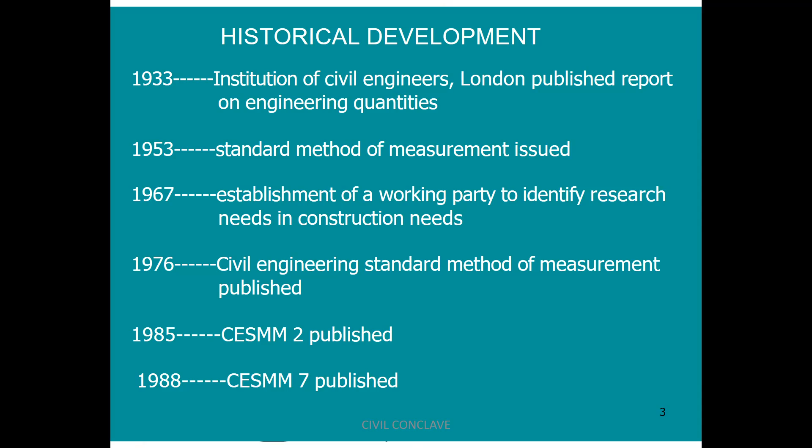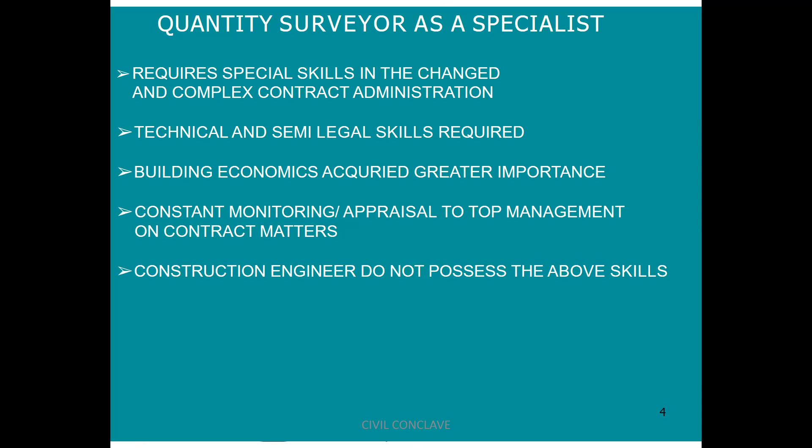Quantity surveyor as a specialist requires special skills in managing change and complex contract administration. Technical and semi-legal skills are also required. Building economics has acquired greater importance, requiring constant monitoring and appraisal to top management on contract matters. Construction engineers do not possess the above skills.

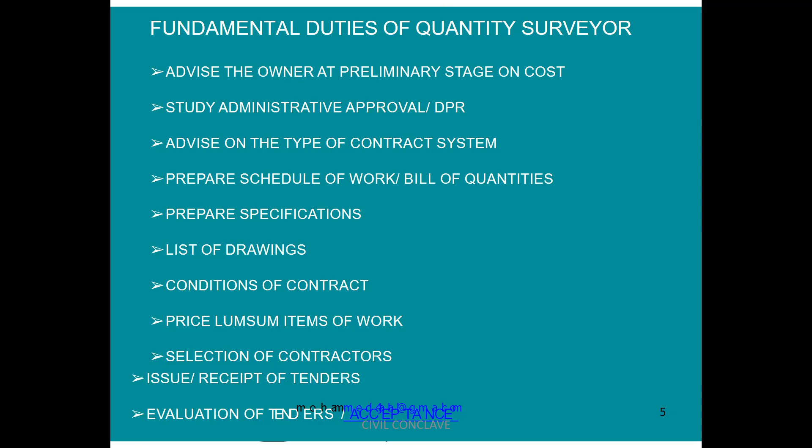Fundamental duties of the quantity surveyor: advise the owner at the preliminary stage of cost, study administrative approval DPR, advise on the types of contract system, prepare schedule of work and bill of quantities, prepare specification, list of drawings, conditions of contract, price lump sum items of work, selection of contractors, issue and receipt of tenders, and evaluation of the tenders.

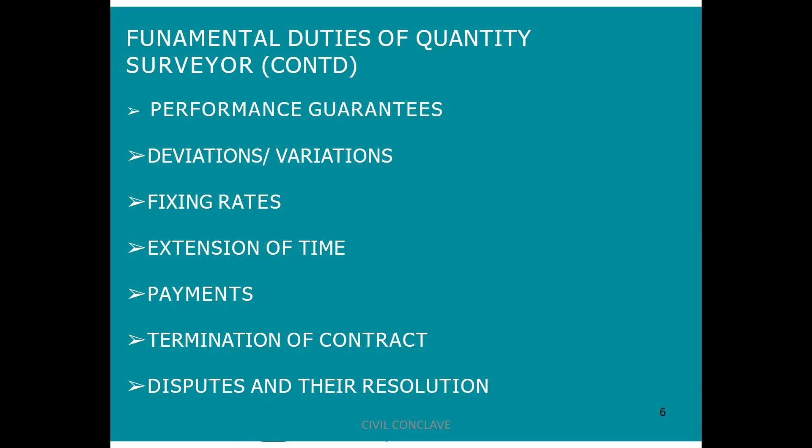He also has to check performance guarantees, deviations and variations, fixing rates, extension of time, payments, termination of the contract, dispute and resolution. All duties stated above include taking measurement and monitoring and variance reports.

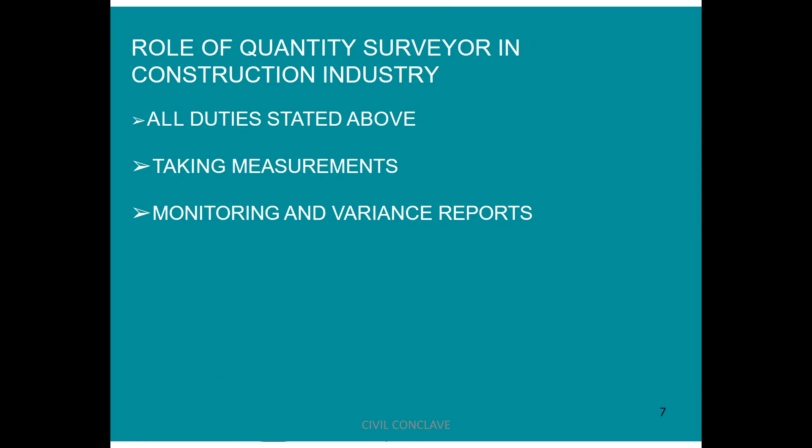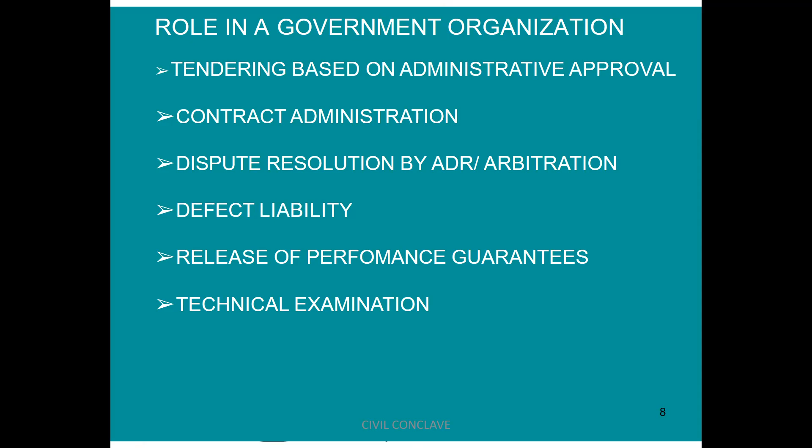Role in a government organization: if he is the quantity surveyor, duties include tendering based on administrative approval, contract administration, dispute resolution, arbitration, defect liability, release of performance guarantee, and technical examination.

Now let us talk about measurement and quantity surveying. Again, we cover historical development, quantity surveyor as a specialist, fundamental duties of a quantity surveyor, the role of a quantity surveyor in the construction industry, the role in government organizations, and the role of a quantity surveyor in planning, design, and construction.

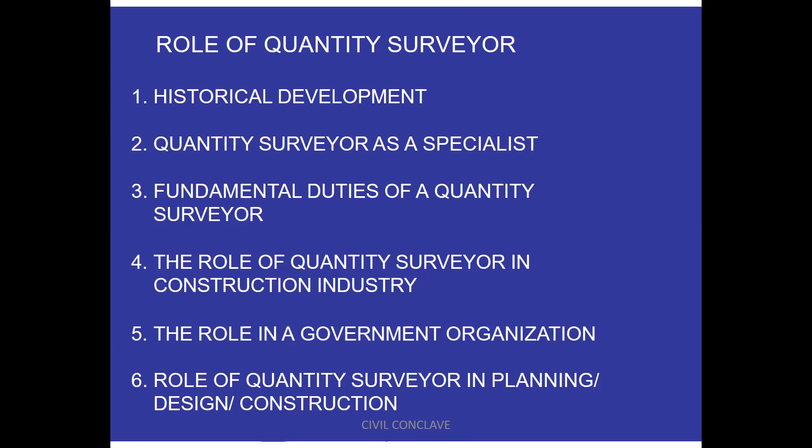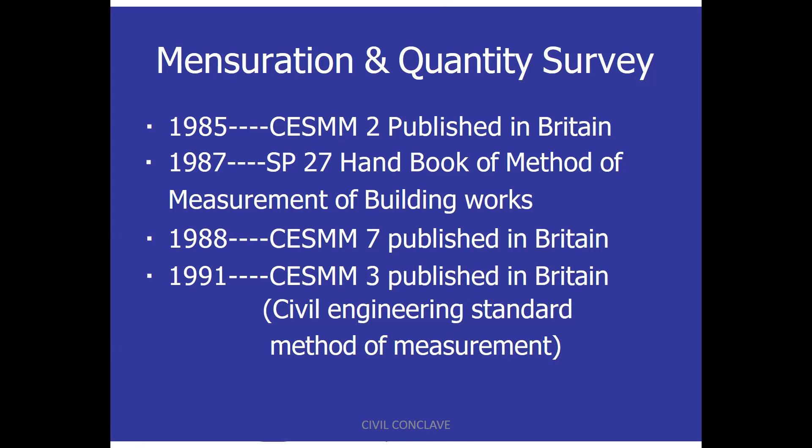In 1933, the standard of engineers was already explained to you. In 1985, CESMM 2 was published in Britain. In 1987, SP27, a handbook of method of measurement of building works, was published. In 1988, CESMM 7 was published, and in 1991, CESMM 3, the Civil Engineering Standard Method of Measurement, was published.

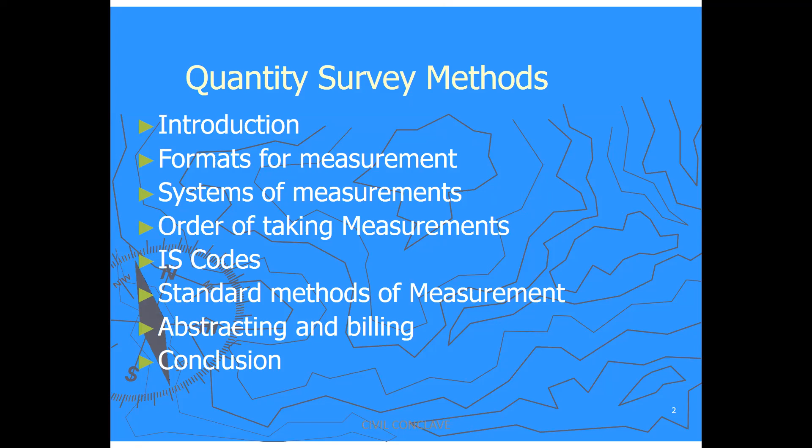Mensuration formula. Quantity survey methods in buildings we are going to discuss now. What we cover in this presentation: introduction, formats of measurement, systems of measurement, order of taking measurements, IS codes, standard method of measurement, abstracting and billing, and then the conclusion.

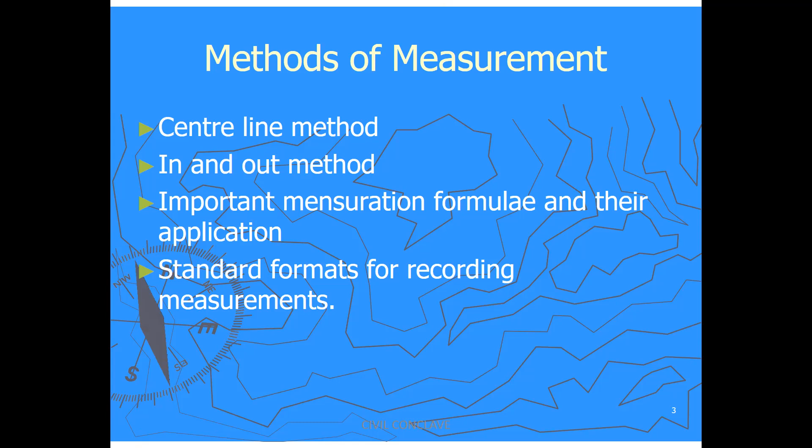The method of measurement varies as follows: center line method, in and out method, important mensuration formulae and their application, and standard formats for recording measurement.

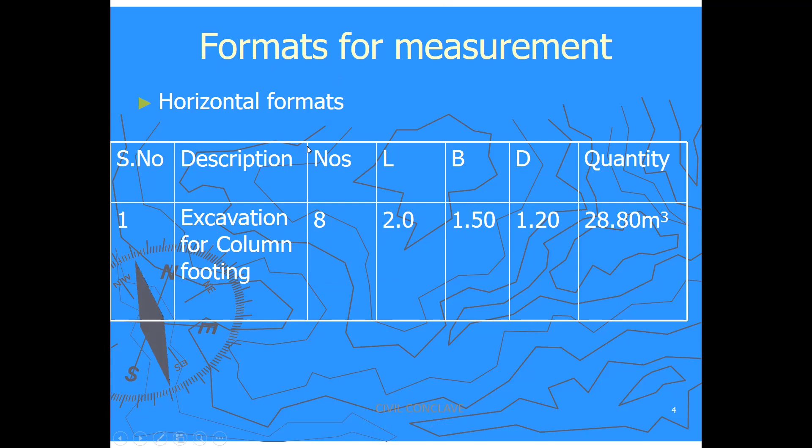For example, if it is an excavation, this is known as horizontal format, wherein you mention serial number, description, numbers, length, breadth, depth, and the quantity. This is known as horizontal format. Then there is vertical format.

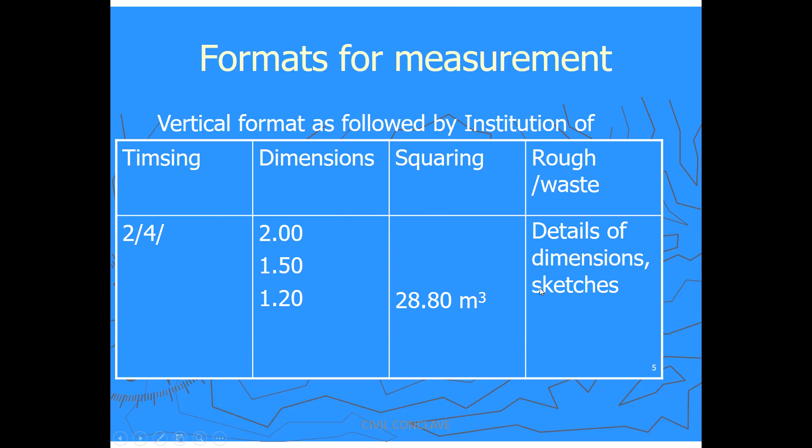Timsing, dimensions like this, 2/4, squaring that is the area, rough oblique waste, detail of dimension and sketches. Trade system means measurements trade-wise. Group system means measurement of all trades simultaneously. This is the order of taking measurements.

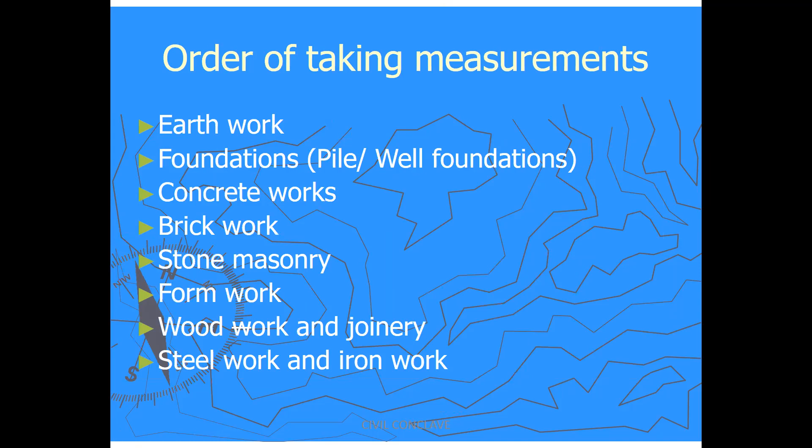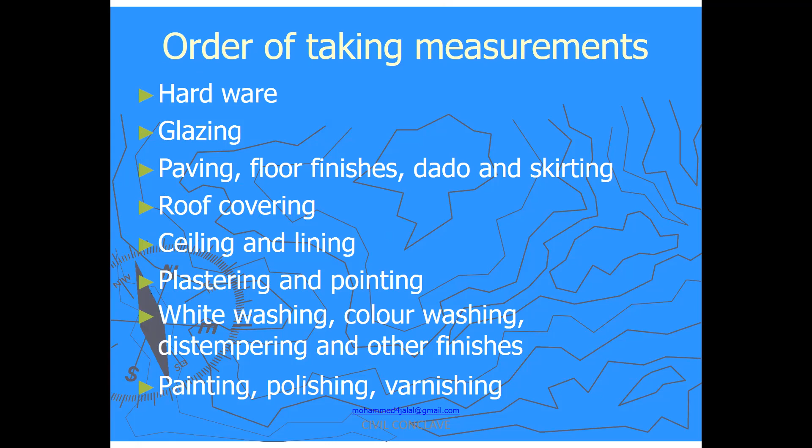The order is: earthwork, foundation, concreting work, brickwork, stone masonry, formwork, woodwork and joinery, steelwork and ironwork, hardware, glazing, paving, floor finishes, dado, skirting, roof covering, ceiling and lining, plastering and pointing, whitewashing, color washing, painting, polishing, varnishing, demolition and dismantling, water supply, plumbing and drains, drainage lines, and road work including airfield pavement.

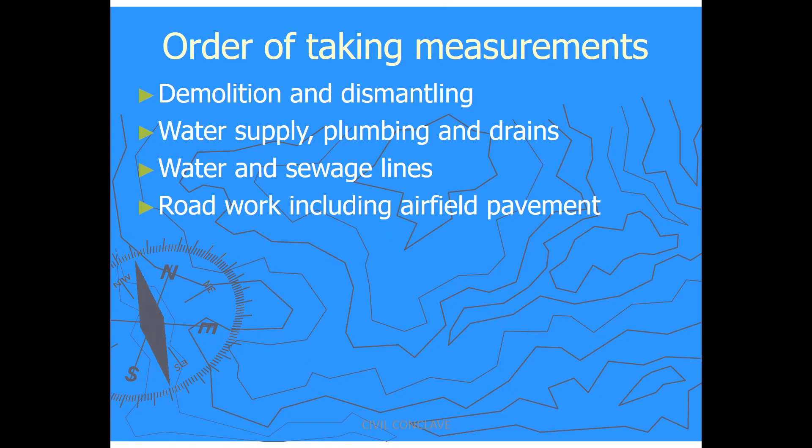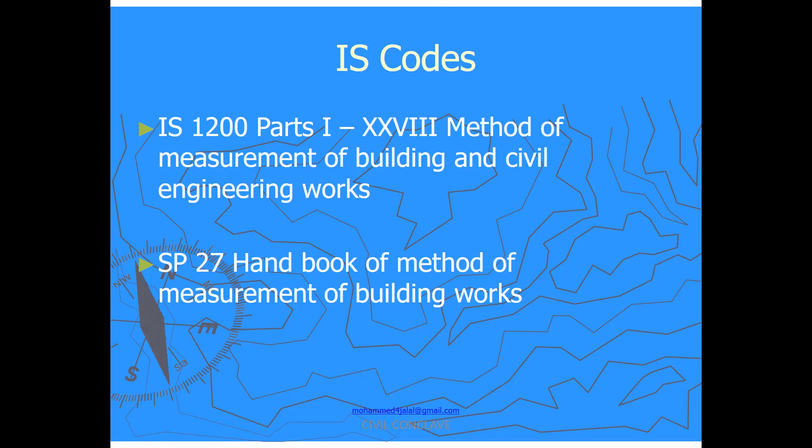IS code: IS 1200 part 1 to 28, that is the method of measurements for civil works. All this has been compiled together in SP27. Standard method of measurement for earthwork: length is measured to the nearest 0.01 meter.

Nearest 0.1 meter for a length above 25 meters. Area in 0.01 square meter. Volume nearest to 0.01 cubic meter. Classification of the soils will be soft, loose soil, hard soil, and other soils according to local condition.

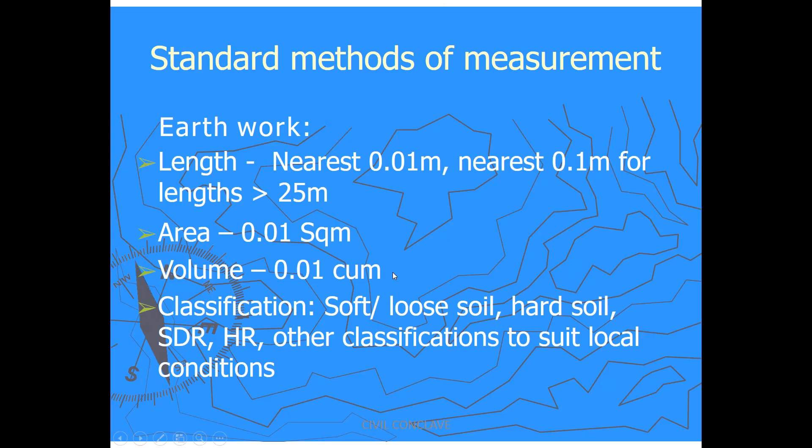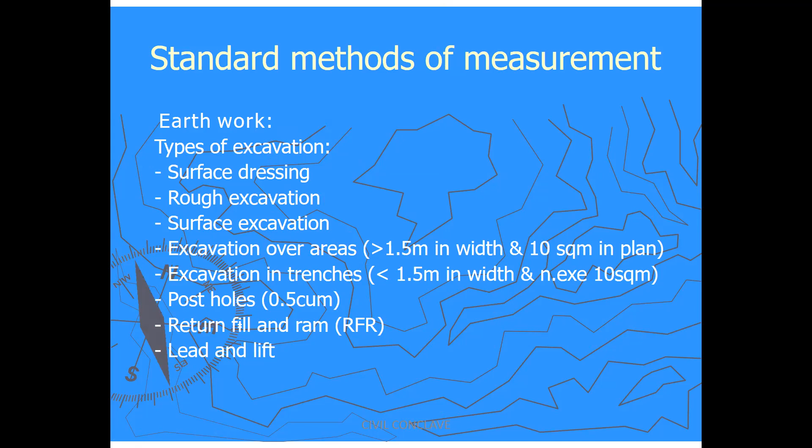Earthwork. Lead should be 50 to 1500 meters or additional 500 meters up to 5 kilometers, like that. Lift is supposed to be at every 1.5 meter interval. Embankment: 10% reduction for solid content, 5% in case machinery is used.

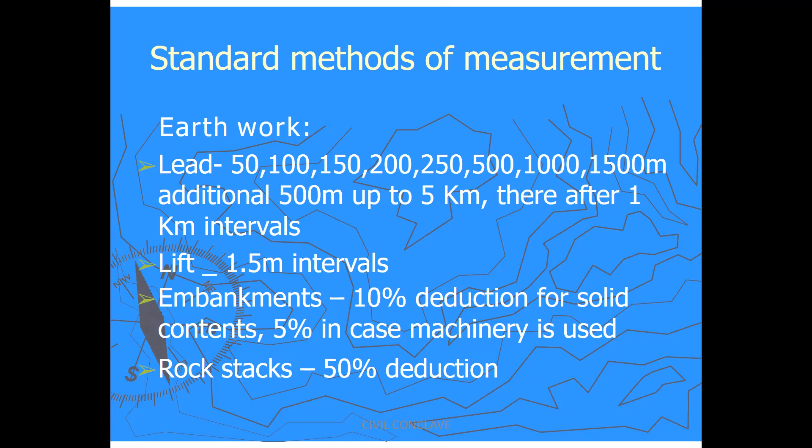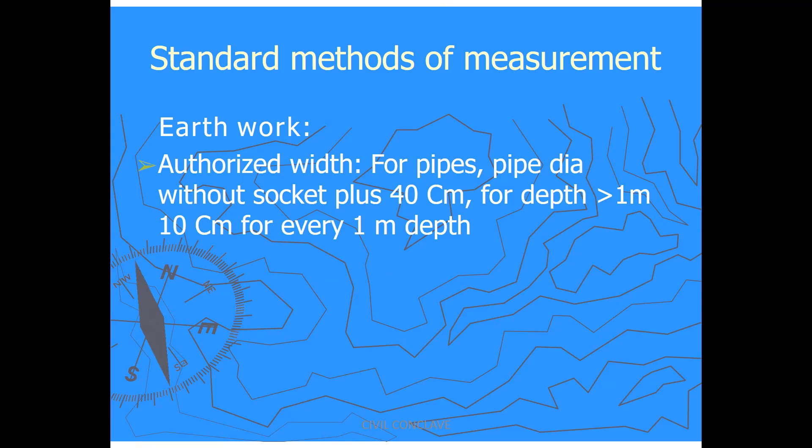Rock stacks, 50% reduction. Earthwork authorized width for pipes, diameter without socket plus 40 centimeters. For depth greater than 1 meter, add 10 centimeters for every 1 meter depth.

Concrete classification of in-situ concreting: foundation, footings, walls, slabs supported on walls, beams, columns, chajjas, lintels, shelves, beams, staircases, balusters, arches, domes and vaults.

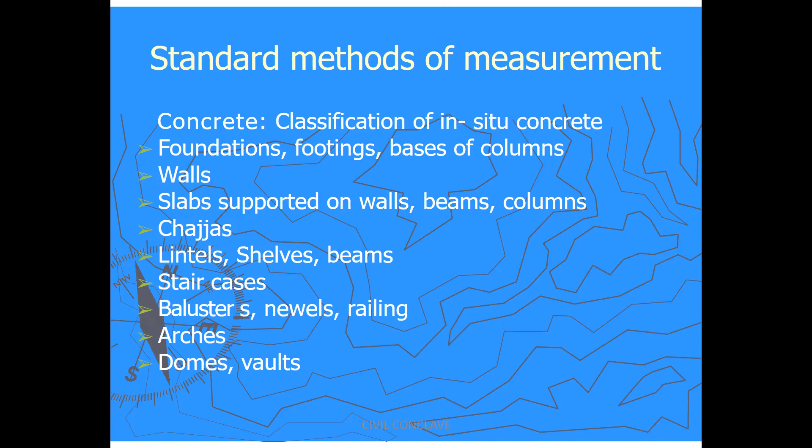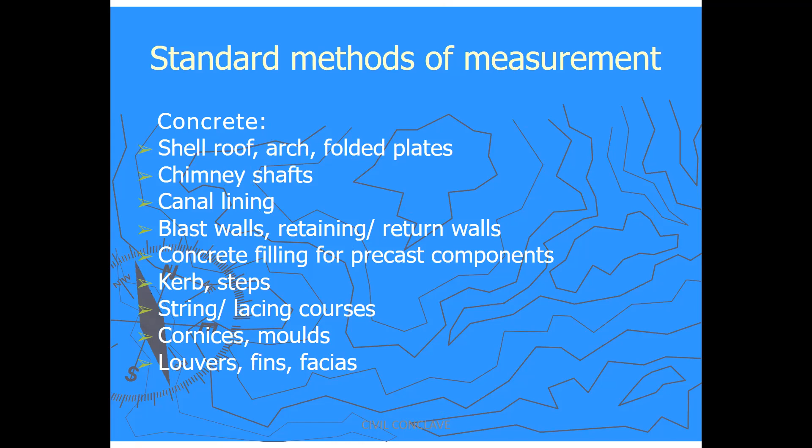Concreting, again it has been defined in shell roof, arch, folded plate, chimney shaft, canal lining, blast wall, retaining walls, concreting filling for precast components, curb, steps, string and lacing courses, cornices, mould, louvers, fins, and fascias.

Concreting measurement. Columns: top of column base to underside of the first floor, that is from first floor slab to underside of the second floor. That means column starting from the top slab to the next slab column top level. That is the method of measurement to verify the column.

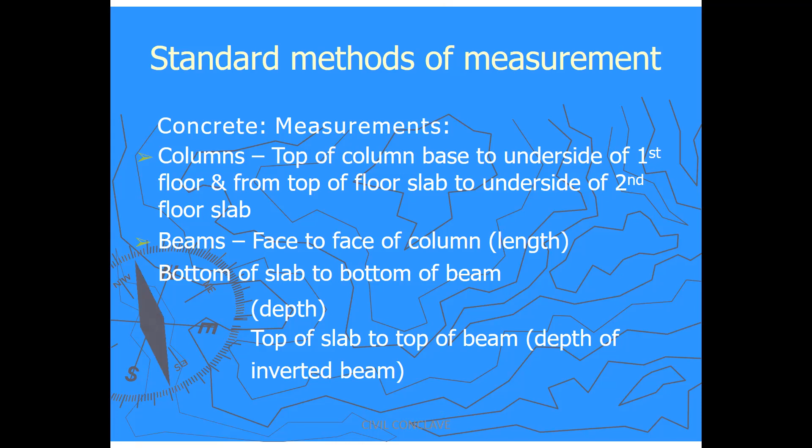Beams: face to face of the column. Bottom of slab to bottom of a beam for depth. Top of slab to top of the beam. Depth of the inverted beam.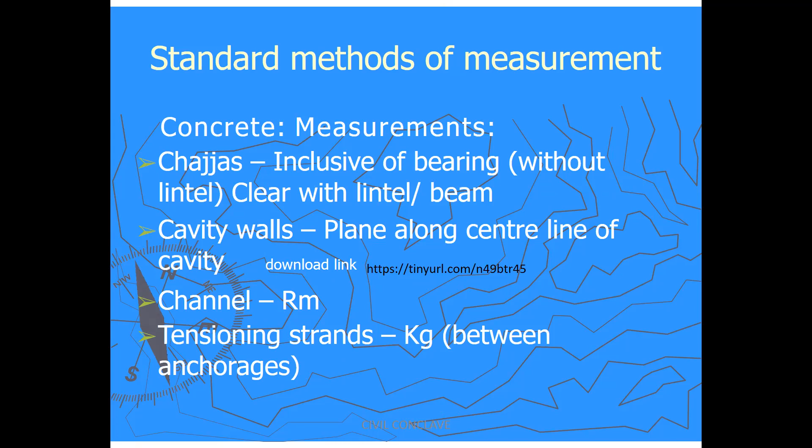Channel: running meter. Tensioning strand: kg, between anchorages. Concreting measurements: expansion joints should be measured in running meter. Waterproofing in kgs. Guniting in square meter.

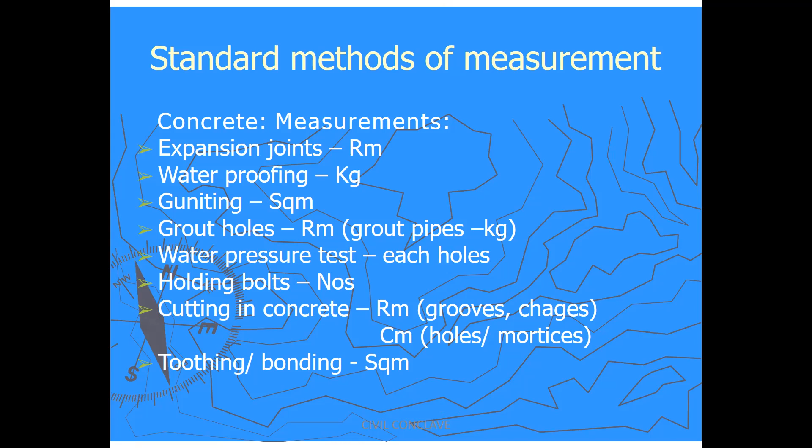Grouting holes in running meter. Water pressure test shall be each hole. Holding bolts in numbers. Cutting in concrete in running meter. Toothing and bonding in square meter.

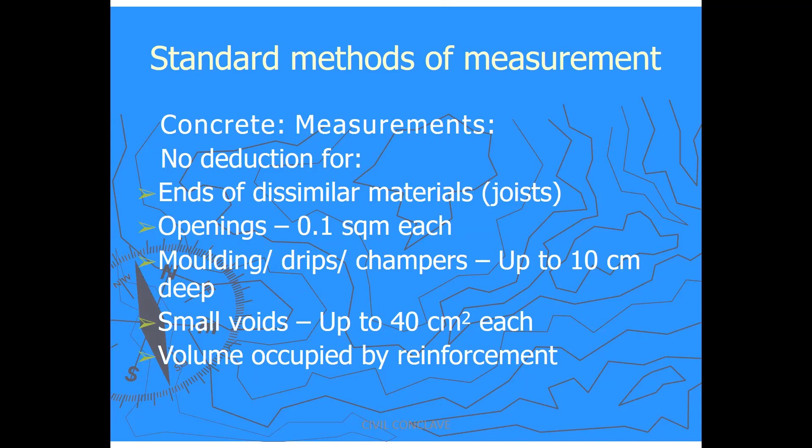Concreting measurements: there will be no deduction for opening less than 0.1 square meter. Small voids up to 40 centimeters square. Volume occupied by the reinforcement should not be deducted.

Brickwork. If it is a 200 mm thick brickwork, it should be measured in cubic meter. Less than 115 mm thick brickwork, honeycomb brickwork, cavity walls, broken glass coping, DPC toothing - they are all measured in square meter.

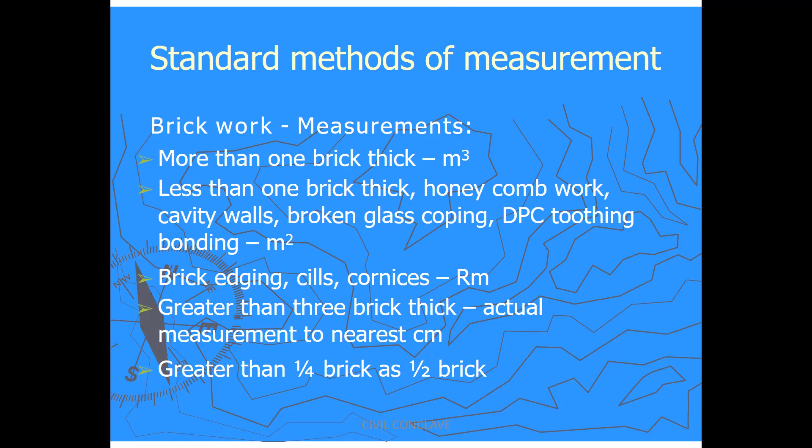Brick edging, sills, cornices measured in running meter. Greater than 3 brick thick, actual measurement to the nearest centimeter. Greater than a quarter brick counted as half a brick.

Brickwork measurement: no deduction for ends of dissimilar materials. Opening up to 0.1 square meter. Bearing of slabs, chajjas where thickness is less than 10 centimeters and bearing does not extend to full thickness.

Concrete blocks, hold fasts, holding down bolts. Chases less than 50 cm girth. Volume occupied by box girders. Honeycomb work measured solid. Stonework.

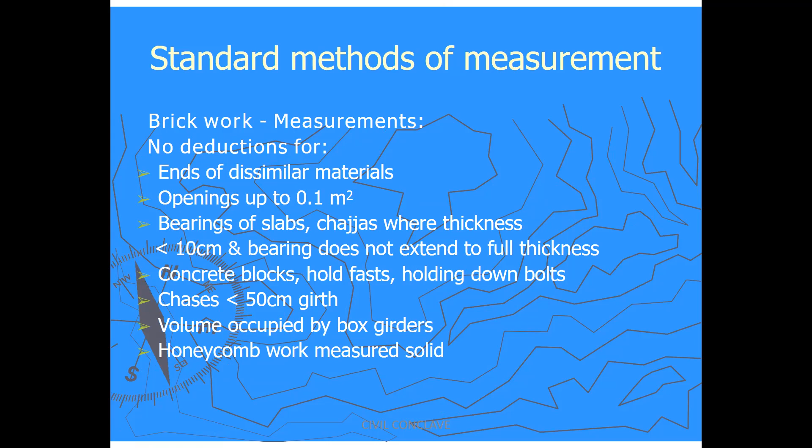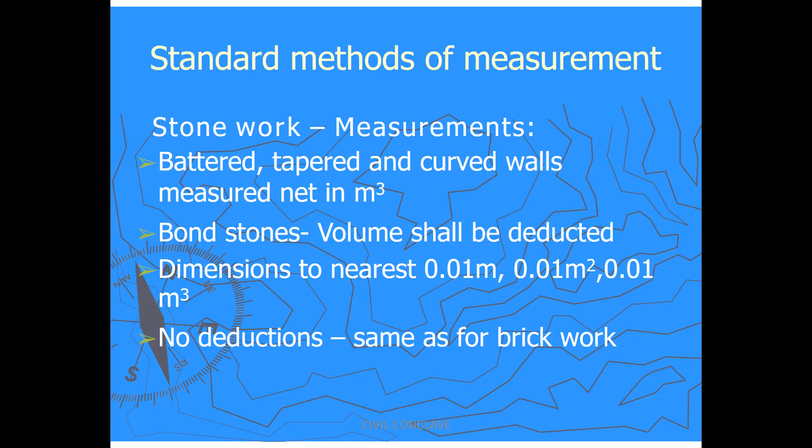How to measure? Battered, tapered, and curved walls measured net in cubic meter. Bond stones volume shall be deducted. Dimension to nearest 0.01 meter, 0.01 square meter, 0.01 cubic meter. No deduction as mentioned in the brickwork.

Woodwork and joinery. Battens less than 5 square centimeter. Scantlings 5 to 20 square centimeter. Length to the nearest 1 centimeter. Width and thickness to the nearest 2 mm at least cross section. For varying cross section, take the section at the larger cross section.

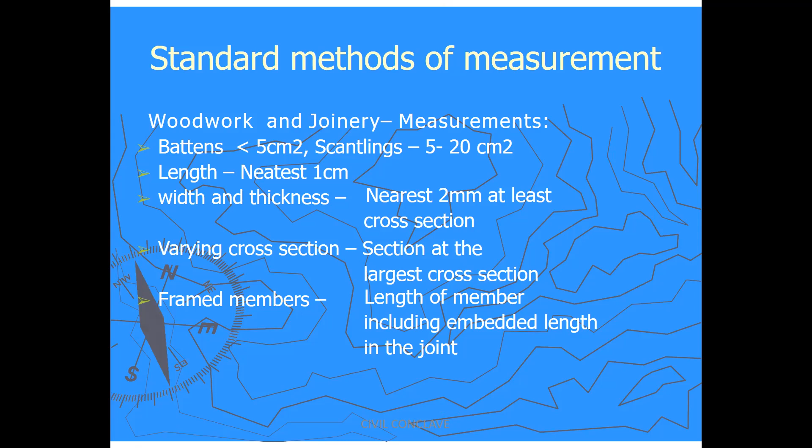Framed members: length of the member including embedded length to the joint. Builder's hardware like tower bolts are all measured in numbers. Length barrel tower bolt: length of the bolt. Locking bolt is the length of the bolt. Body hinges: length of the joint.

Parliament hinges: width between flanges and the height of the hinge. Handle: grip length. Piano hinges: overall width of the flaps when open.

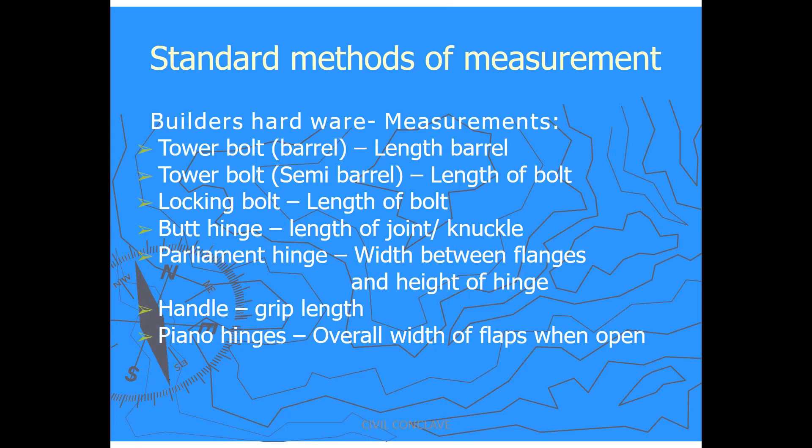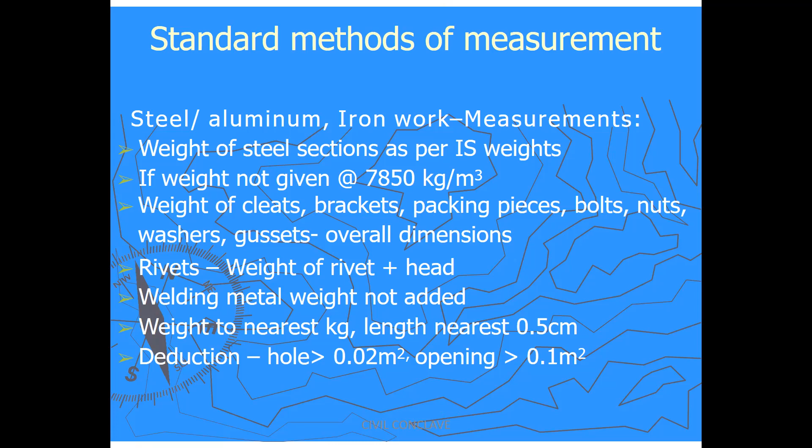Weight to the nearest kg. Length nearest to the 0.5 centimeter. Deduction: hole if it is greater than 0.02 square meter. Opening greater than 0.1 square meter.

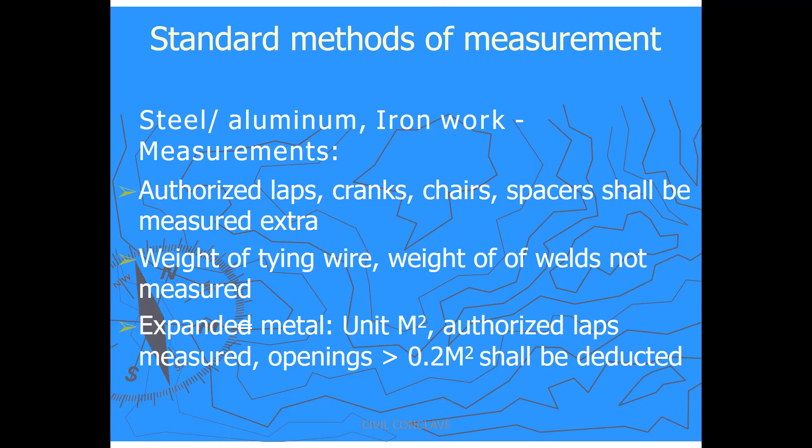Steel, aluminum work measurement. Authorized laps, cranks, chairs, spacers shall be measured extra. Weight of a tying wire, weight of welds should not be calculated. Expanded metal unit: square meter. Authorized laps measured, openings greater than 0.2 square meter shall be deducted.

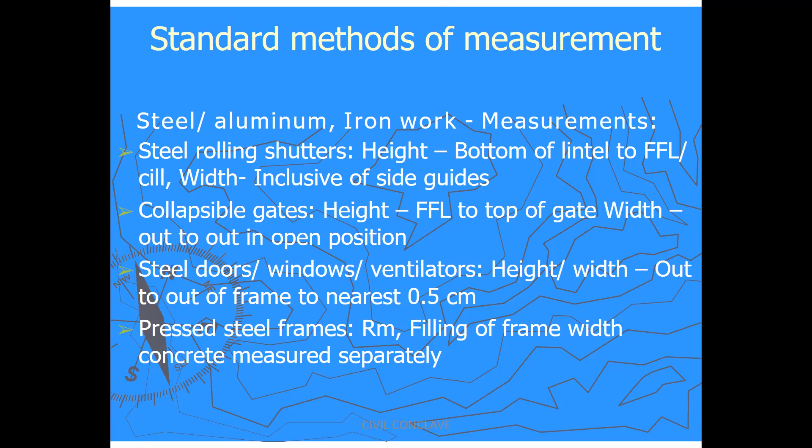Steel doors, windows, ventilators: height and width out to out of frame to the nearest 0.5 centimeter. Pressed steel frames in running meter, filling of frame with concreting measured separately.

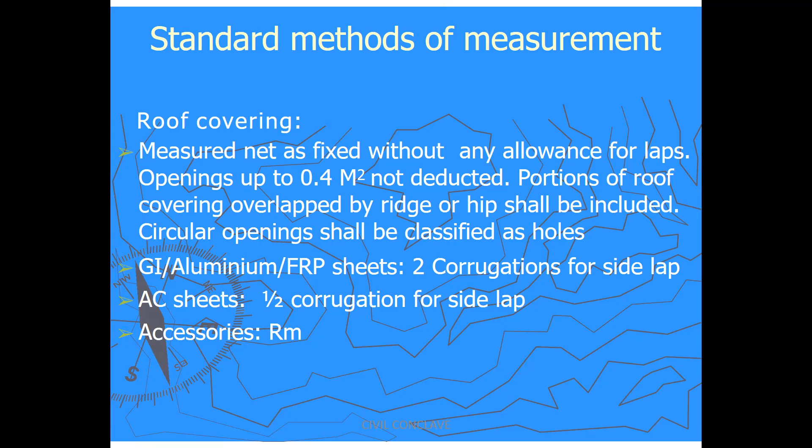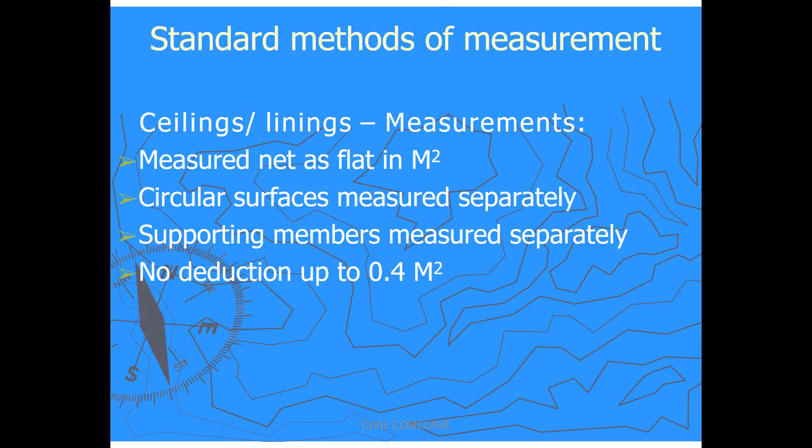GI aluminum FRP sheets, two corrugations for a side lap. AC sheets, half corrugation for a side lap. Accessories in running meter. Ceilings and lining measurements, measured net in square meter. Circular surface measured separately, supporting members measured separately, no deduction up to 0.4 square meter.

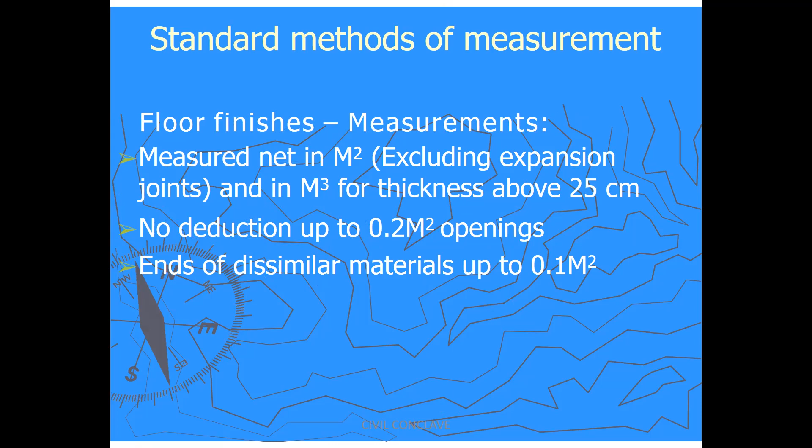Floor finishes measured net in square meter, excluding expansion joint, and in cubic meter for thickness above 25 centimeter. No deduction up to 0.2 square meter opening. Ends of dissimilar material up to 0.1 square meter.

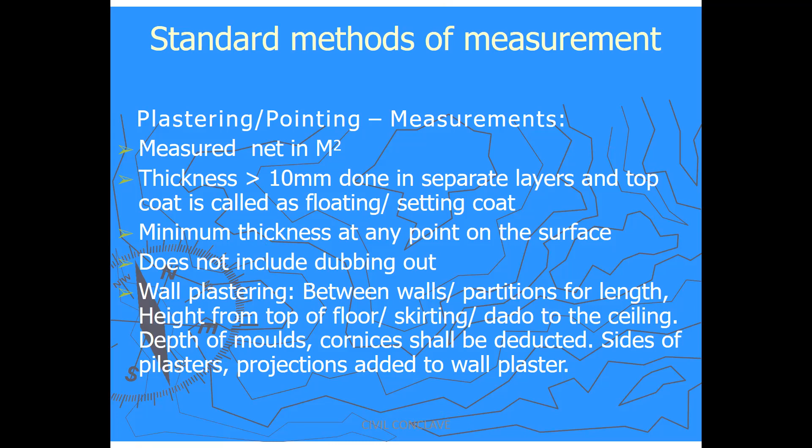Wall plastering between walls, partitions for length and height, from top of the floor, skirting, dado to the ceiling, including depth of the molds. Cornices shall be deducted. Sides of pilasters projection added to the wall plaster.

Deduction: no deduction for opening up to 0.5 square meter. Opening greater than 0.5 square meter but less than 3 square meter, when both faces are plastered with the same plaster, deduction for one face only.

When both plastered surfaces have different plaster, deduction will be done on the side of the frame on which the width of reveal is less. If both reveals are equal, 50% on each side. When width of the frame equals thickness of the wall, full deduction on both sides.

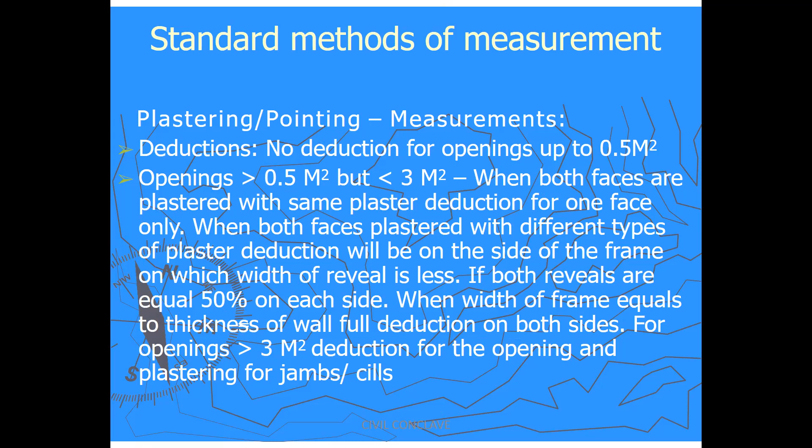For openings greater than 3 square meter, deduction for the opening and plastering of jambs and cills. Plastering and pointing for ceiling, measurement between the walls. Beams: plaster sides of the beams added to the ceilings. Stairs measured as ceiling plaster.

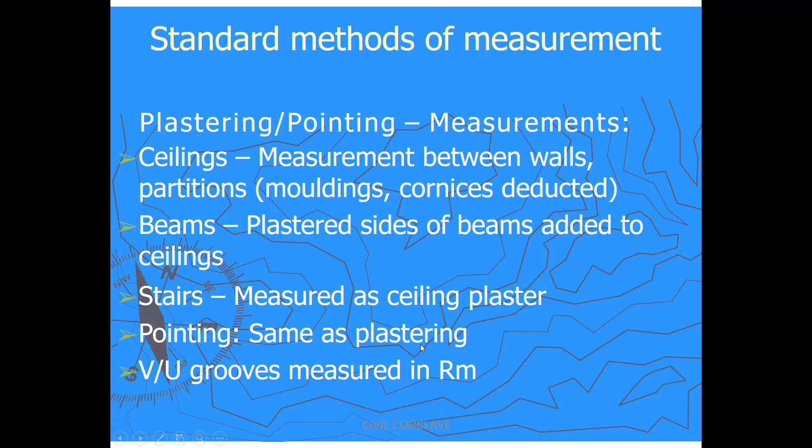Pointing, same as plaster. VU grooves measured in running meter. Color washing on walls and ceiling measured separately. Measurement will be that of the plaster surface.

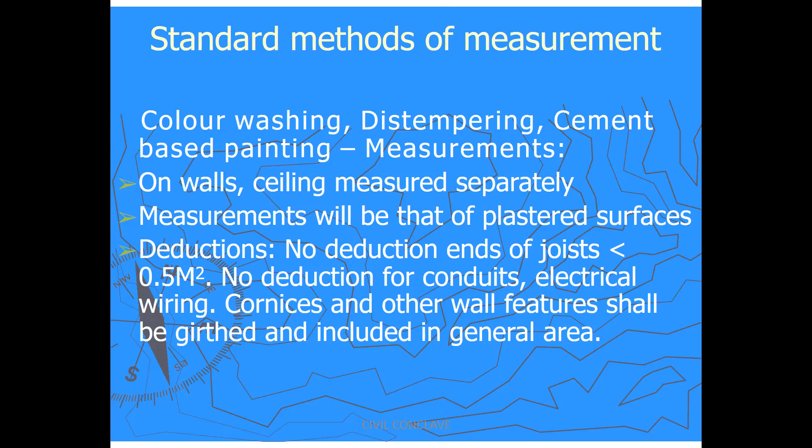Deduction: no deduction for ends of joists less than 0.5 square meter. No deduction for conduits, electrical wiring, cornices. Cornices and other wall features shall be girthed and included in the general area.

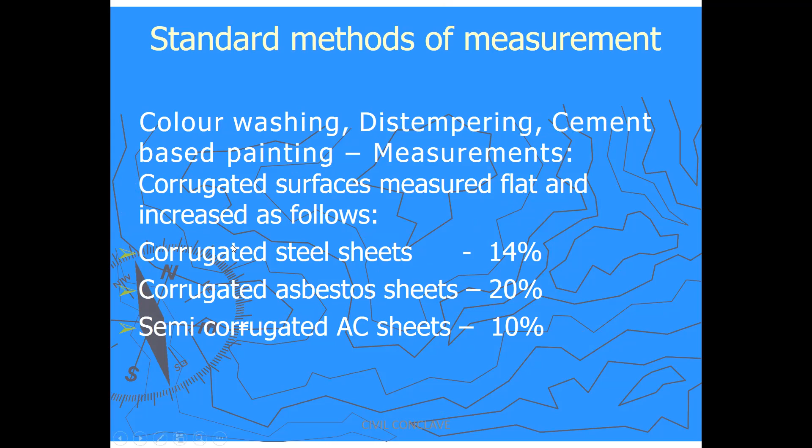Color washing coefficients: corrugated steel sheet will be 1.14 times. Corrugated asbestos sheet will be 1.2 times. Semi-corrugated asbestos will be 1.1 times.

Glazing: glass panes measured to the nearest 0.5 centimeter. Irregular circular shapes measured as the smallest rectangle or square from which the shape could be cut. If ground glass, allowance in thickness for loss due to grinding to be given.

Measurements for doors, windows, ventilators, fixed, etc., up to and exceeding 0.5 square meter.

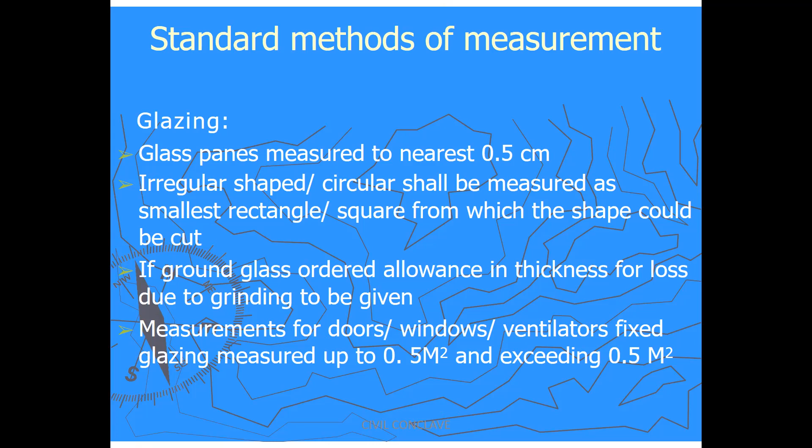Painting measurement: uneven surfaces, equivalent areas. Height shall be from the bottom of the lowest rail to topmost rail. Doors and windows of composite section measured separately with application of appropriate coefficient, with the centre line of common rail being the dividing line. Where shutter is provided with a clearance greater than 15 centimeter, such opening shall be deducted.

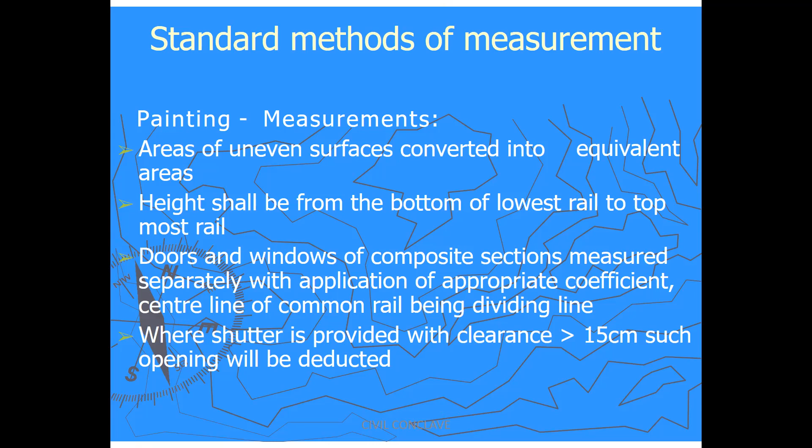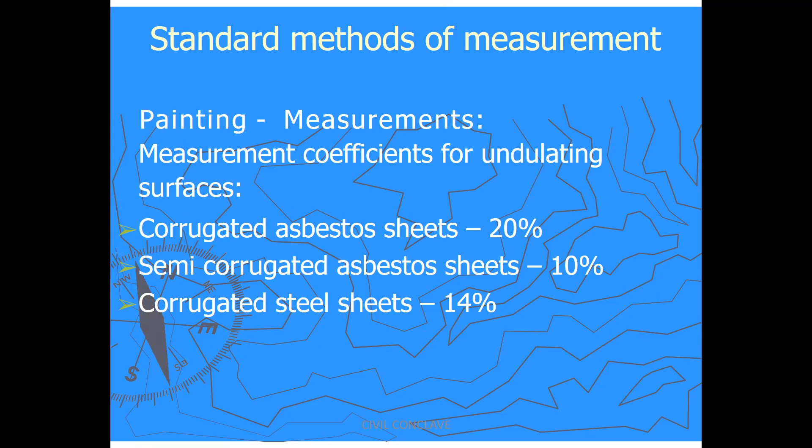Painting measurement coefficient for undulating surfaces: corrugated sheets, 20%, meaning you multiply the area by 1.2 times. Semi-corrugated sheets, 1.1 times. Corrugated steel sheet, 1.14 times.

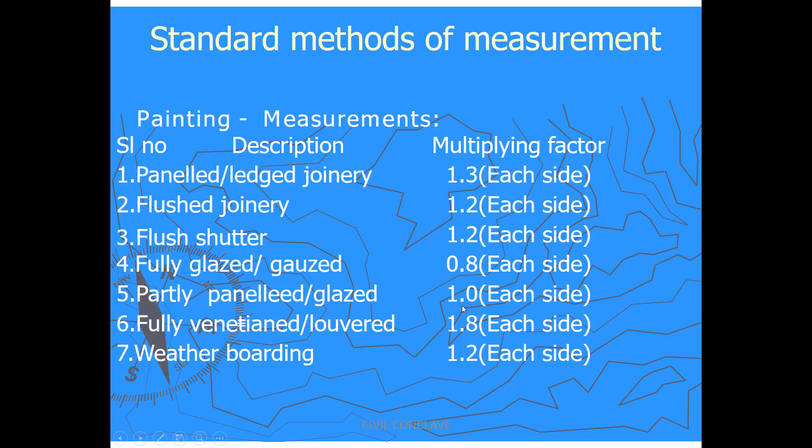Painting measurement coefficients: panel joinery 1.3 each side, flush joinery 1.2 each side, flush shutter 1.2, fully glazed 0.8, partly paneled glazed 1, fully venetianed 1.8, weatherboarding 1.2.

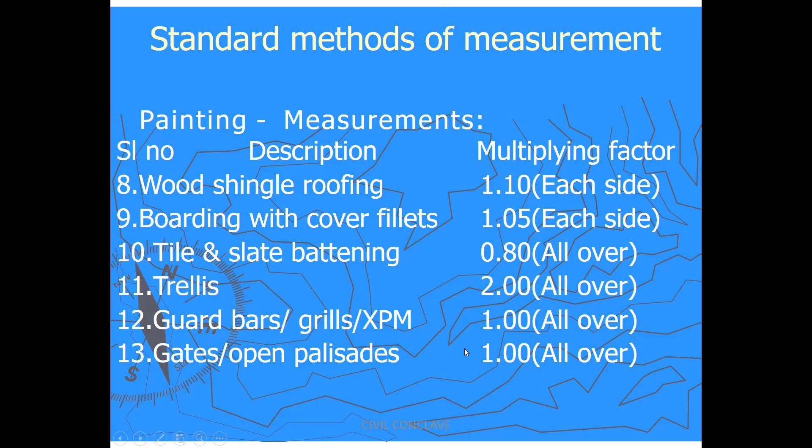Wood shingle roofing will be 1.10, boarding with cover fillets 1.05, tile and slate battening 0.8, trellis 2, guard bars will be 1, gates and open palisades 1.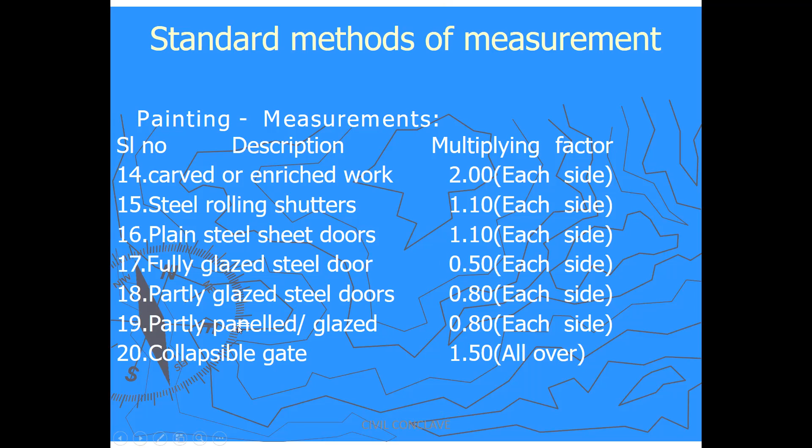Carved and enriched work 2 each side, steel rolling shutters 1.1, plain steel sheet doors 1.1, fully glazed steel doors 0.5, partially glazed doors 0.8, partially paneled glazed doors 0.8, collapsible gates 1.5.

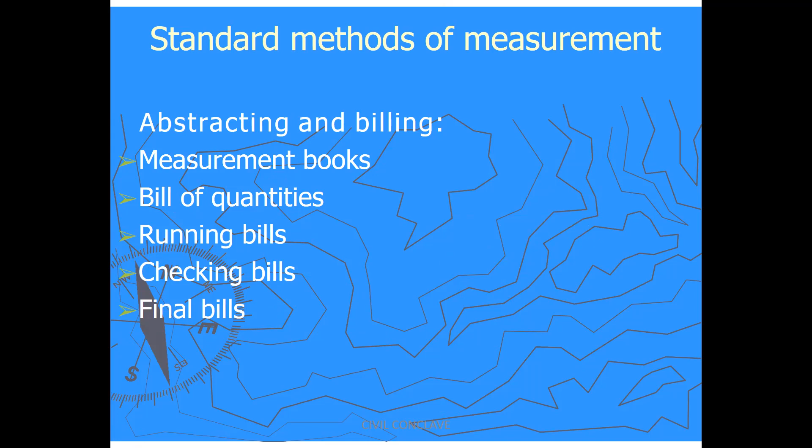Abstracting and billing should consist of a measurement book, bill of quantities, running bills, checking bills, and final bills.

Conclusion: measurement and billing is an important aspect of any construction industry. There is a need to standardize the procedures all over the country, and all concerned should be familiar with the standard methods of measurement. With the participation of international firms, it is all the more important for accuracy.